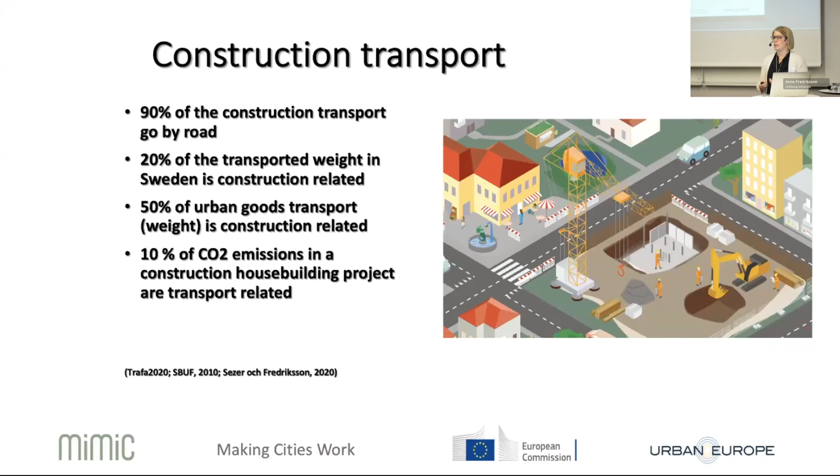And we can do a lot. When we started this project, we had very little knowledge of construction transport. During this project we've collected a lot of data, and we're still in need of much more. But these actually show some of the transport patterns we can see in construction projects.

We can see that on average we have about 0.55 to 0.57 transports per square meter in a house building project. What's really interesting is that about 50% of the transports during the day arrive between 7 and 9. And who else is traveling between 7 and 9? The rest of the city. So these transports actually disturb a lot, and there's nothing except habit that says they have to come between 7 and 9. With a little planning, with the help of, for example, checkpoints, which some of my colleagues will come back to, we can make a big difference.

We can also see that about 43% of the deliveries come by truck, so there is an overuse of trucks, I think - larger transports than needed for the deliveries.

The Mimic project has had three goals we'd like to make an impact on. We want to increase the livability and attractiveness of life in a city through decreasing congestion, accidents, noise and vibrations caused by material flows to and from and on site, because we have an impact on the vicinity.

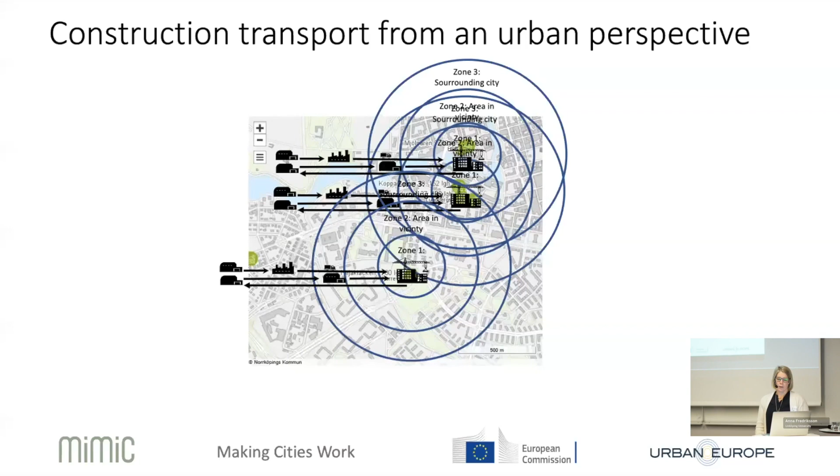Why is it a problem to actually control and do something about construction transports? It's because construction projects run as silos. We have before production, we have a lot of planning, but that planning doesn't always include how to handle things during production.

During production, we had construction logistics, but it's also first seen as a problem once you start. Urban traffic is seen as a problem or something you have to deal with once you've finished the projects. But we have constant ongoing projects, so these phases always go into each other, so we should not treat it as silos.

The overall project goal of the MIMIC project has been to reduce the negative impact of construction sites by improving the governance of construction logistics through implementing smart governance concepts. My colleagues here will describe more of what it means.

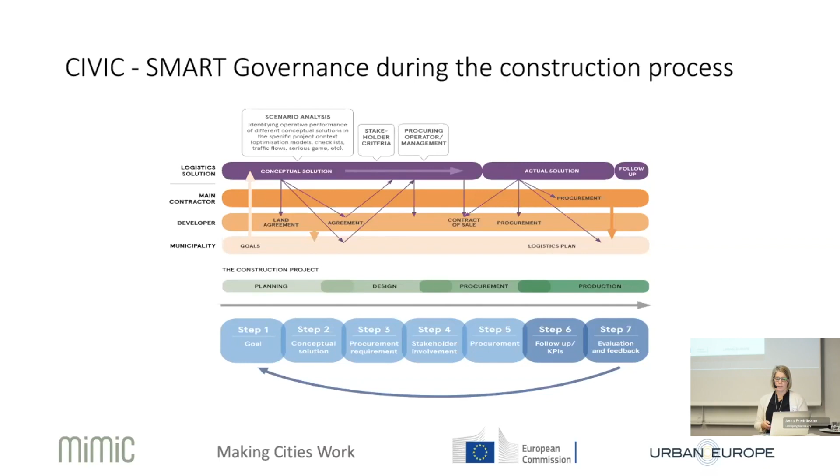This was our starting point, which we have further developed in the MIMIC project, working in 6 work packages. The first, work package 0, has been project management run by Lindholmen or Closer, with an excellent project leader here the last years, Roderick.

Work package 1, we focused on construction logistics scenarios and stakeholder involvement. Work package 2, impact assessments. Work package 3, data analysis and optimization of construction logistics. We had a lot of ongoing interplay between these parts.

In work package 4, we tried to gather what we've done in the other work packages into the testing and implementation of smart governance concepts, which we now, as a final part, try to disseminate.

During the project, we also developed a game - two types actually, one board game and one mega game - because we think one of the main issues of construction logistics is that we don't have the knowledge within urban development, urban planning and so on to handle it. That's why it's also usually ignored.

That's what I wanted to say to start with. I want to hand over again to Roderick.

Thank you, Anna. Thank you for your presentation.

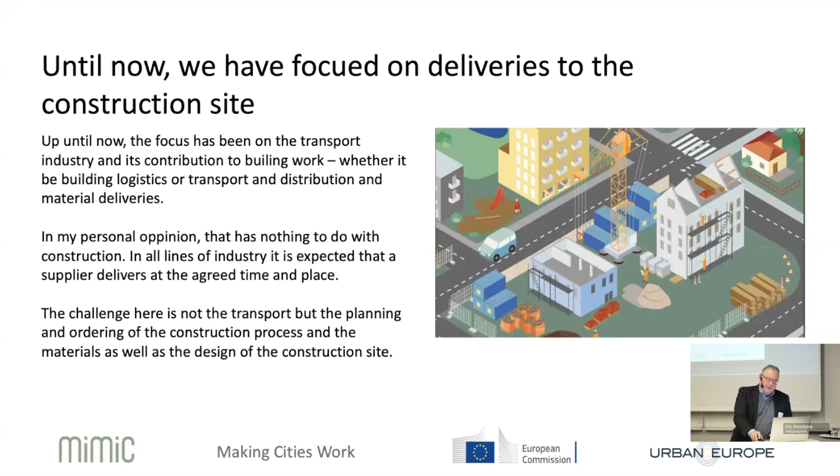In the future, if we remember the first picture, the surrounding areas are what get the problems from the construction site. We need to start looking at that also, because everyone who buys an apartment for 3, 4, 5, or 10 million doesn't want to live on a construction site. So we need to look at that.

We also need to be aware of the future. Can anyone accept living on a construction site, or will they start going on Facebook, Twitter, Instagram, or whatever and writing about it? That kind of thing is going to stop so many projects, because we get negative involvement from the societies, the cities around us.

The status for now, the last 5 years—I'm sorry to say—we get a lot of data, but we haven't moved the construction site at all, if I'm honest. We still make the same mistakes. We still do the same thing.

One thing we've started doing is using planning and delivery systems, and there are 3, 4, 5 coming to the market. I'm sorry to say, a lot of them come from software companies and not from anyone who has actually been on the construction site. So they can do everything with the software, but not so much on the construction side.

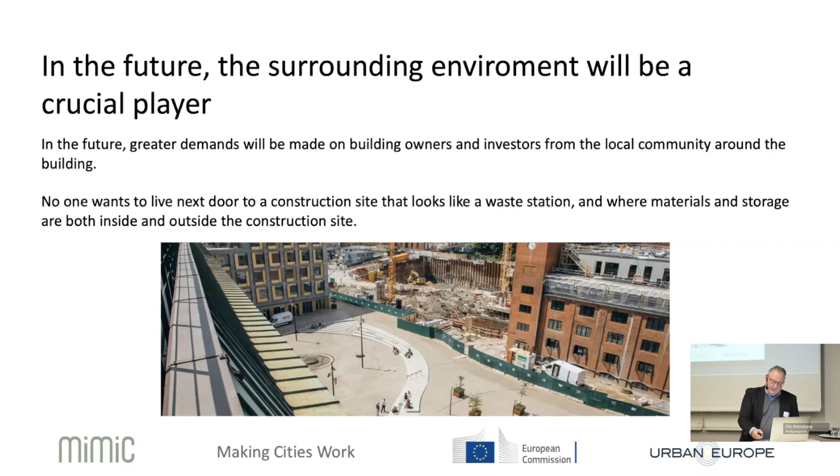If we have to do the right thing in the future, we need to start when we design the project, so we use the right size of material. We design the construction site based on the area we're in. Is it possible to deliver on the existing road, or do we have to build a new road to get in? We have to take care of the whole area, looking from a helicopter perspective all the time.

Which involvement do the construction sites have in the area around them? So construction logistics starts when the developer has an idea. How do we want to sell this project? What do we want to leave to the area with this project? Because if you treat everyone badly during construction, they're never going to be satisfied with the house. So we need to start much earlier in the project.

One more time: what's in it for me? That's the only thing that can move this. And as long as no one wants to do anything other than make fast money, we're not going to get anywhere else in the construction site.

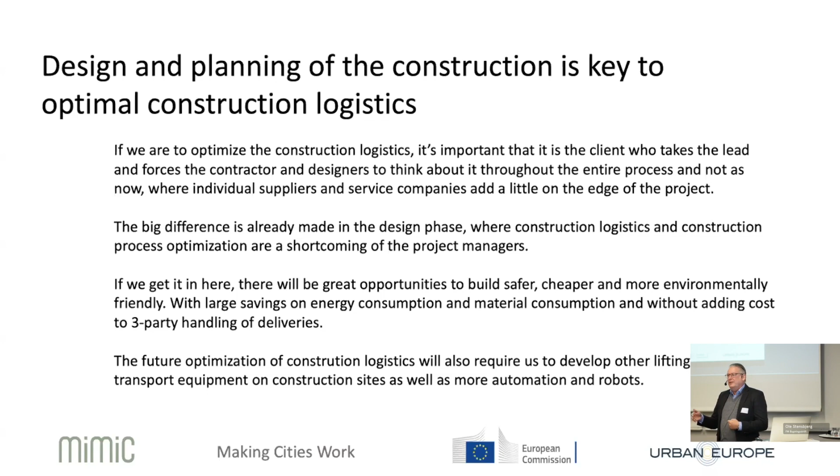Now, some companies deliver material and call themselves logistics, or it's a company making software and they call it logistics, or it's someone carrying things in and they call it logistics. We need to be more professional and help from beginning to end. It's not about making fast money by carrying things in - it's about planning and designing.

So when you need to plan construction logistics, you need to know something about buying materials. You need to know about designing. You need to know how to do construction. You need to know how to be a site manager. You need to understand the process. You need to know a lot about communication with the area around you - everything we've discussed here is so important. If you don't know that, you can't design construction logistics. If you only know about cheap labor carrying things in, or software to optimize it, no software functions at all without humans. We need to combine these things.

The most important thing for whatever we're going to do in construction and logistics is data. If we don't know how much there can be, where to put it, how to handle it, then we don't get anywhere. Data is everything, and you don't know that if you only work with software. So it's from the beginning - designing, production, execution.

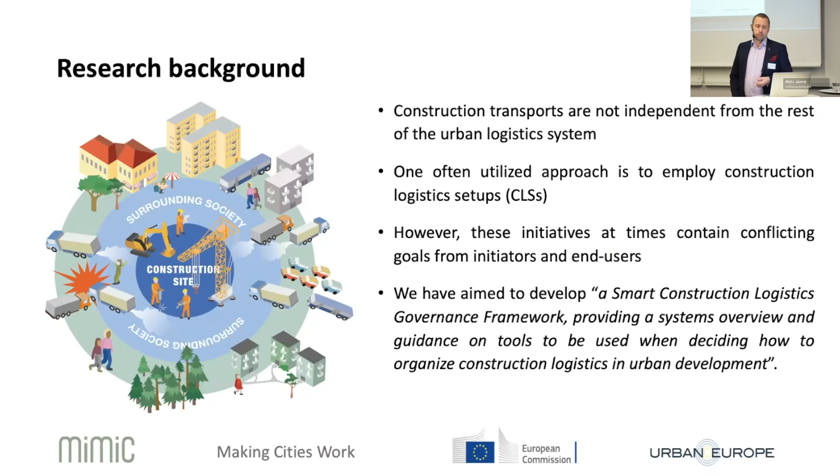But first, a quick retrospective, or a trip down memory lane.

Anna mentioned her daughter was born during Civic, and I'm not going to talk about her, but I will talk a little bit about Civic. Because in 2018, when we were finishing off the Civic project, we presented the first smart governance concept that Anna already showed you.

In this smart governance concept, we started by taking the construction project's phases into consideration, seeing that we have planning, design, procurement, and production. We tried to fit in where we should design, implement, and operationalize a construction logistics setup during the construction process. We saw that we had different actors impacting the design of this.

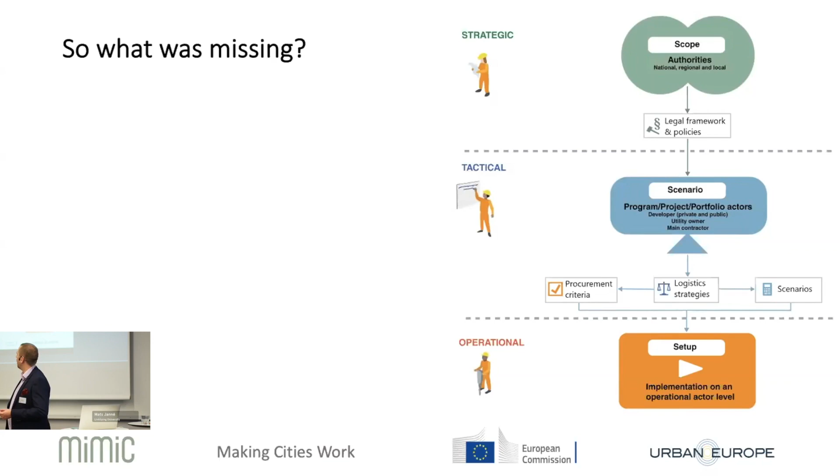We saw that we probably needed to know more. So what was actually missing in our view in Smart Governance Concept 1.0? I was trying to figure this out the other day. Firstly, what we didn't have was the view that decisions are taken on different planning levels.

We take decisions regarding construction logistics on a strategic planning level with a long planning horizon, but we don't necessarily see it as a construction logistics decision. I'll get back to this a bit more. We take some decisions on the tactical level, the mid-horizon planning level, and of course we do take construction logistics decisions every day on the operational planning level as well.

Secondly, we needed a stronger identification of the different actors' roles in these decisions. In our Smart Governance Concept 2.0, we've seen that these long-term strategic decisions, which aren't necessarily viewed as construction logistics decisions, are often taken on an authority level. It can be things like introducing environmental zones or increasing demands on following up the environmental impact from construction or deliveries to construction sites, etc.

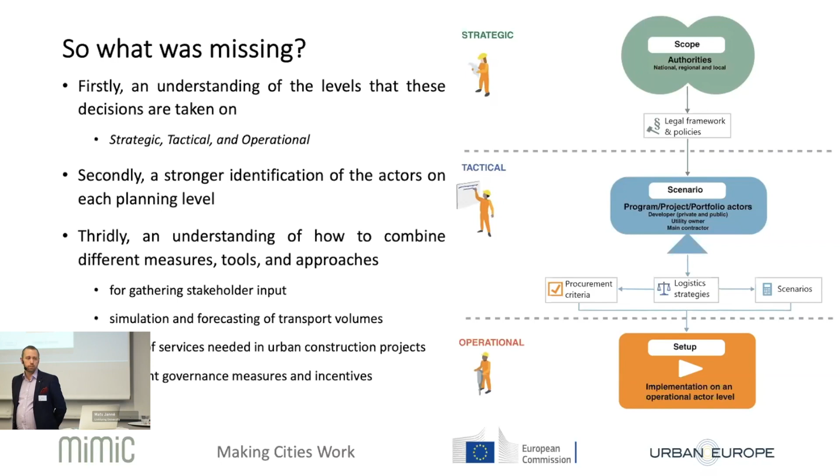And we've been working with these questions for many years now - 3 years in Mimic - so let's stick to that time plan.

What we've seen is that on the authority level, construction logistics is partly approached as a way of reducing environmental impact. This is in line with all our EU goals, our UN goals of reducing climate impact, etc. This is a strong driver for authorities and cities to start demanding more from construction logistics.

We also see that we have some activities regarding construction logistics planning on all three planning levels - strategic, tactical, and operational. But from the authority level, it's primarily on the strategic level, and the planning on these three levels is rarely performed by the same actor, or even with the same types of goals. So this leads to a difficult situation.

If we want good governance of construction logistics within urban development, we need a holistic perspective on what we are doing. We need to understand what's happening on the construction site, as Ole mentioned, and we need to understand how we can control the deliveries to and from the site to reduce impact on the city as well. But we don't really get this holistic approach unless we introduce this as a question on all the different levels.

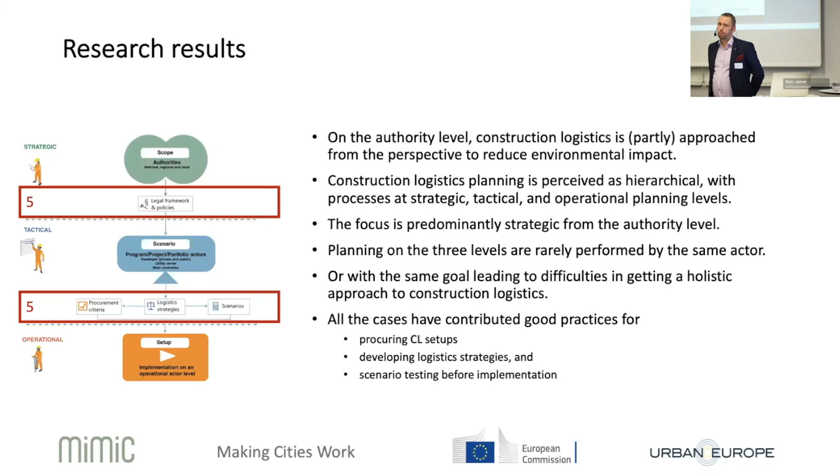We see that there are many good initiatives and many good tools around Europe. We have good practices for procuring construction logistics setups, developing logistics strategies, and scenario testing before implementing a construction logistics setup. We will hear more about this later today. It's this holistic, smart approach that we need, that we are kind of lacking though. And that's pretty much where we come in, I hope, and I hope you will agree as well.

Because we have developed Smart Governance 2.0, and this is how it looks. It didn't used to look like this, it's much more beautiful now. But what we can see from this is that we can still keep the strategic, tactical, and operational decision levels or planning levels, and we need to keep all these three levels.

On the strategic level, that's where we set the scope for what construction logistics should achieve in urban development. Here we have identified authorities, different municipal departments, regional authorities, etc., as key actors that can, through legal frameworks and policies, actually start demanding how we approach construction logistics in a good way. However, tweaking our policies or changing the legal frameworks might be difficult to do quickly, but in the long term, perhaps we can do that as well. But we need to know what we are going to demand. So we need to have knowledge from different KPIs, we need to measure the impact, we need to understand what different actors need and what they can contribute to in the overall construction logistics vision.

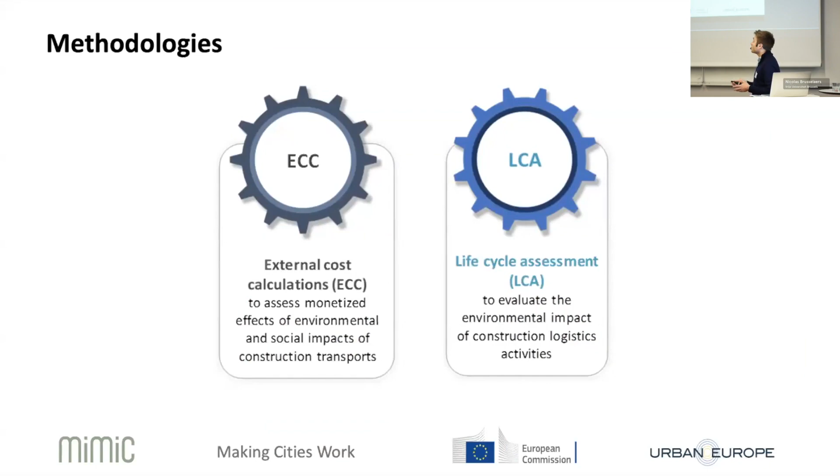External costs come in all kinds of shapes and formats. The most known are climate change and air pollution, but we also think about noise and congestion, for example. Mainly road transport is responsible for a large share of external cost, and these can all be monetized into what we call the external cost calculator, to evaluate and compare different scenarios against one another.

In Belgium, we gather our data from what we call onboard units - GPS trackers, GPS receivers that are mandatory in all trucks across the entire territory of Belgium. So we have location data on all the trucks in Belgium, and we have the transported distance.

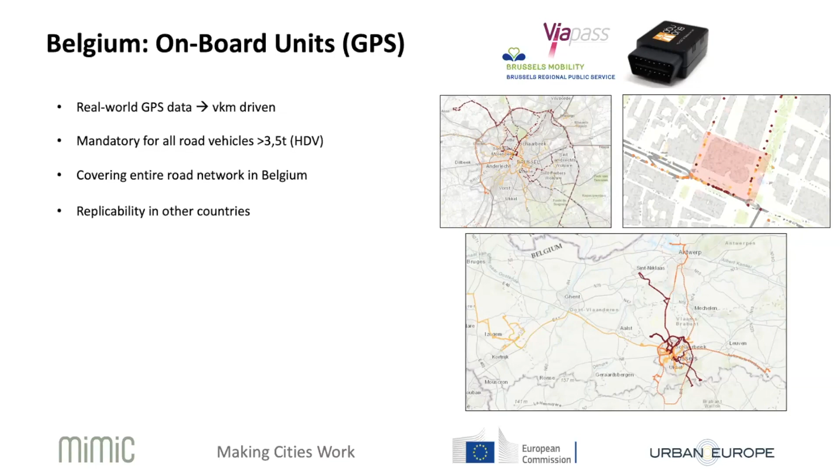With this transport data from the OBUs, we developed a filtering algorithm to filter from the entire set the vehicles that deliver transports to the site. So we know per day how many trucks are driving, and we can recreate the origin-destination pattern, the route taken for each truck and its characteristics. We then process that into a geographical information system environment to detect more information, and calculate the external costs linked to those transports.

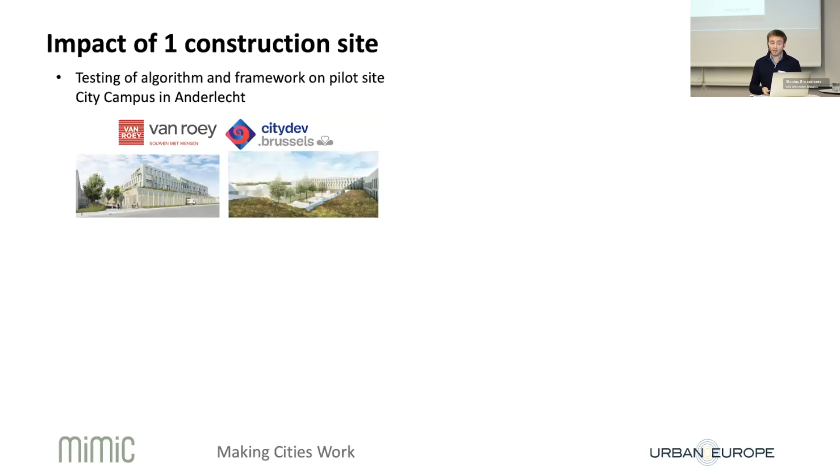So what we wanted to show you here is that we first tested this algorithm and its impact framework on one pilot site, namely the one located in Anderlecht in the Brussels Capital Region. Like Anna mentioned before, it has a huge impact, not only on the construction zone itself and its immediate surroundings, but also on the highway, the ring, the highway infrastructure, and the road network along the canal region - the canal that crosses from south to north through the capital. It also has an impact on the traffic system as a whole throughout the city.

Now we are checking if it's possible to extrapolate those findings and use that algorithm for 83 large construction sites in the Brussels Capital Region, to see what the impact is on the entire city from large construction sites.

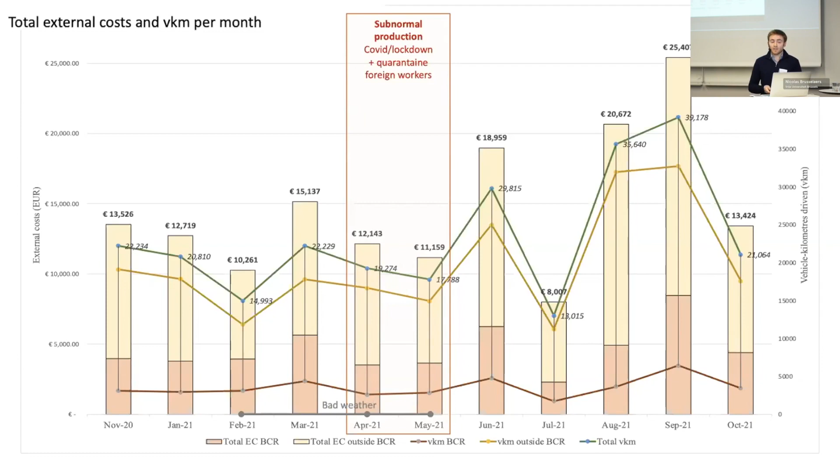For example, in April and May we have subnormal production because of lockdown and foreign workers needing to quarantine. We have the construction holidays, which are typical simultaneous holidays in the Netherlands and Belgium in July, with much lower deliveries. We also see 3 big months - March, June, and September - with a lot of concrete and steel deliveries. Especially for September, we see a nice transition from the superstructure of the building to the ceiling, and different construction phases from August to September with a lot of material deliveries for insulation, windows, etc.

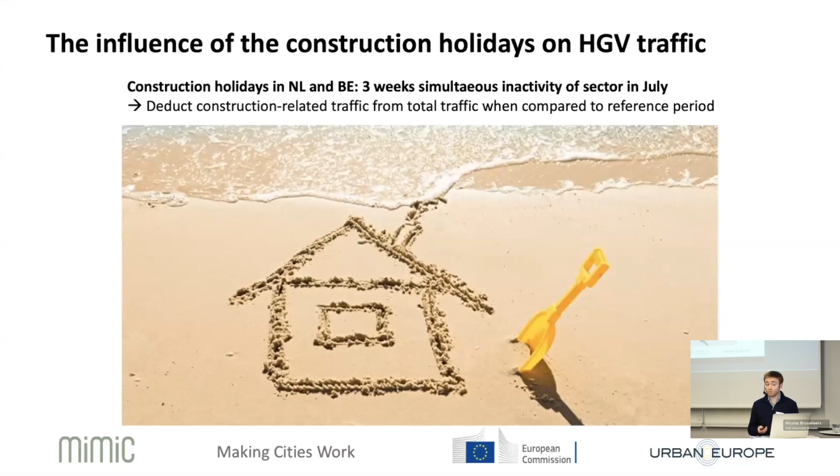Now, this is one construction site in the Brussels Capital Region, but what if we can deduct the influence of the construction holidays on all trucks in Belgium? We have simultaneous holidays - a 3-week period in July where the construction sector is totally inactive in the Netherlands and Belgium. So we can deduct construction-related traffic from total traffic by comparing it to a reference period outside the construction holidays. We see that difference is approximately 17.5%, so we know that 17.5% of total traffic is related to construction-related transport.

Important to note here is that construction transport is said to represent more than 15% of total external costs, which is a large share of total traffic. This mainly comes from congestion costs, but also infrastructure, climate change, and air pollution costs.

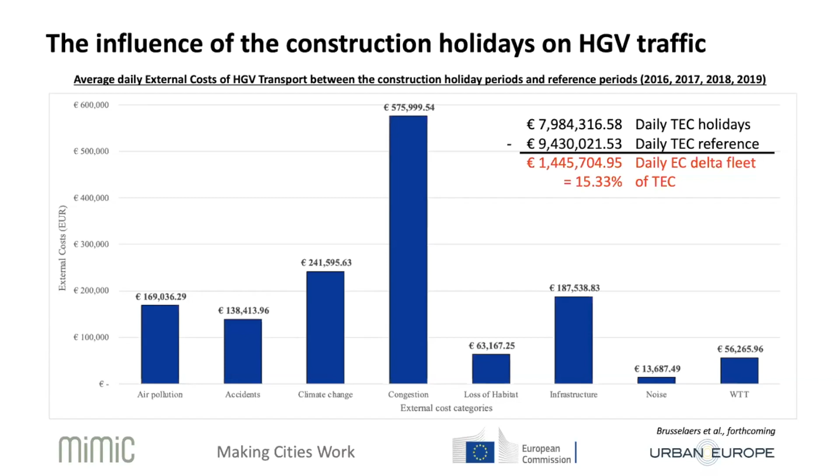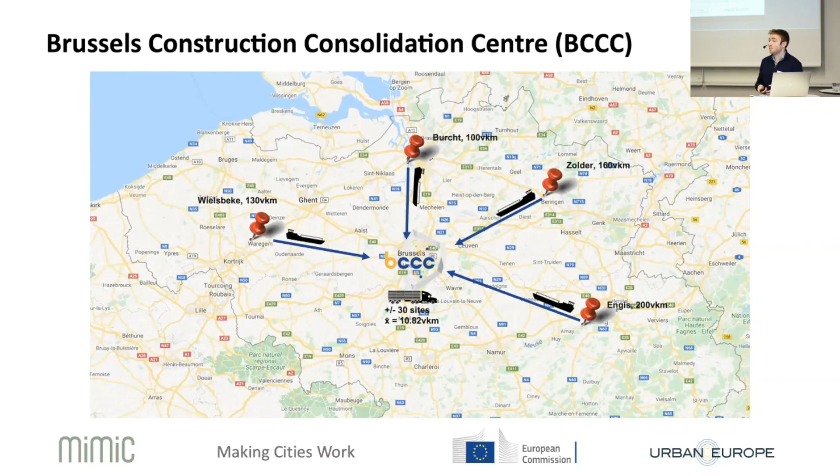This was a final case, from the Brussels Construction Consolidation Center, in which we analyzed 2 scenarios: what would happen if we implement a BCCC, which was the actual case, compared to business as usual, where we deliver all transport from the suppliers - those 4 main suppliers across Belgium - immediately to the construction site. The conclusion was that thanks to implementing the BCCC setup, we have a reduction of 59% of total external costs, mainly from congestion, because we take a lot of trucks off the highways in Belgium, and a large reduction in climate change costs.

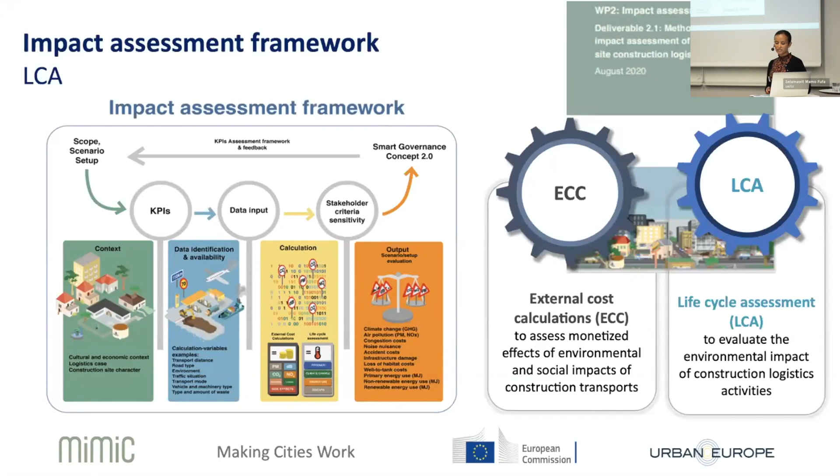As Nicola mentioned, we developed the impact assessment framework within the MIMIC project, using two methods. I will talk about LCA, which we use for environmental impact assessment of construction logistic activities. We use as a case study the demonstration pilot, the Oslo emergency ward, which is under construction and expected to be finalized in 2023.

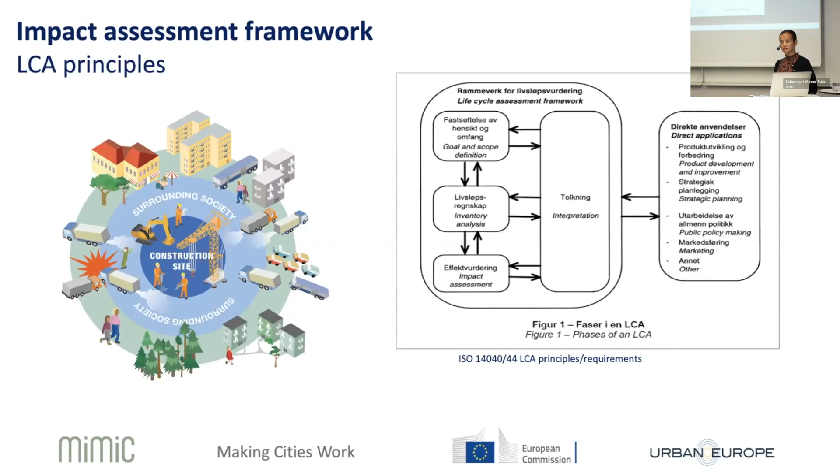There are different construction logistic solutions considered in this project, including the use of fossil-free and emission-free solutions. For our evaluation, we follow the LCA principles: define the goal and scope of the work, collect data, perform impact assessment, and interpret the results.

The goal for our demonstration pilot is to evaluate the environmental impact from on-site and off-site construction logistic activities. We include the transport of mass and materials to and from the construction site, the construction machinery, and on-site construction activities, including internal transport, energy use, and waste, and also the transport of waste and waste treatment.

For the life cycle assessment, we use the life cycle modular principle, and we include two life cycle modules: A4, which is the transport from the buildings to the building site, and A5, the construction activities. There are two indicators we have used: greenhouse gas emission and resource use, both renewable and non-renewable energy.

We have collected data for the activities shown on the right side, based on actual data from the demonstration pilot. Since this is an ongoing project, we have collected data only from the groundwork, foundation, and superstructure construction phase, and we have used generic background data for the evaluation.

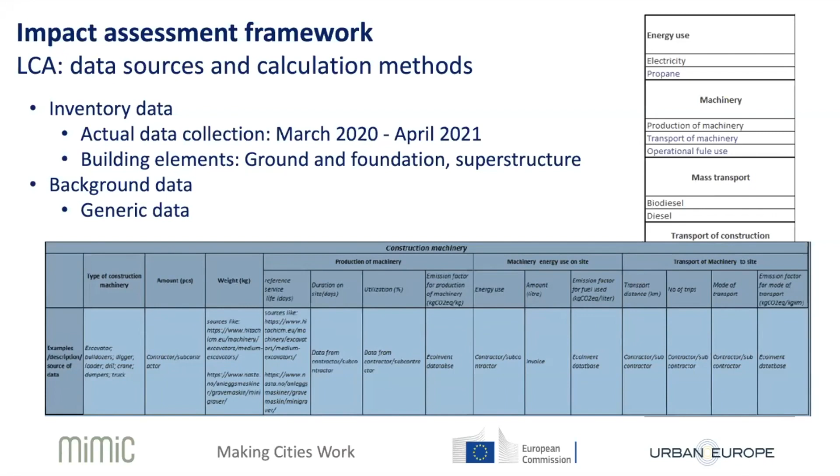To see the impact from emission-free, fossil-free solutions based on the base case scenario, or what they have considered in the project, we have conducted scenario analysis for the machinery and mass transport. We also try to consider the impact of modal shift for the material transport.

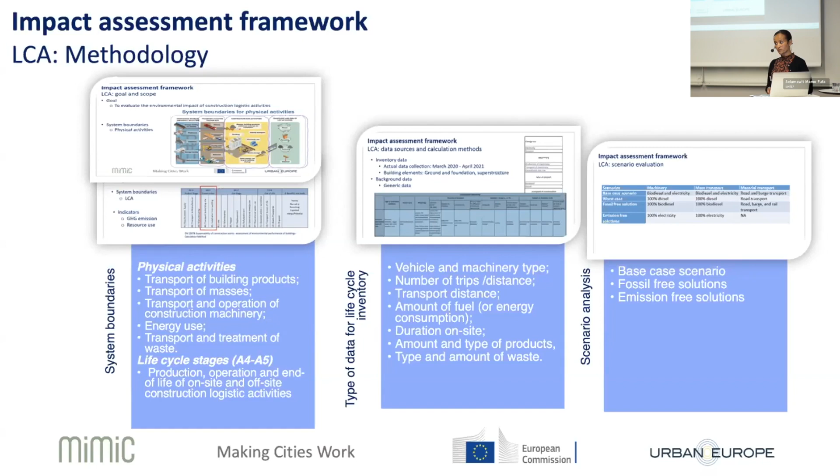By combining this, based on the data we have collected for the physical activities and also the scenarios, we have conducted the impact assessment. This is the result for the emission part.

For the scenario evaluation part, since mass transport is the main emission contributor, we considered these scenarios as I mentioned earlier. If 100% diesel was used, there would be 40% more impact from mass transport compared to the base case scenario. But if all the vehicles were electric driven vehicles, the impact would have been reduced by more than 80%. This is very significant.

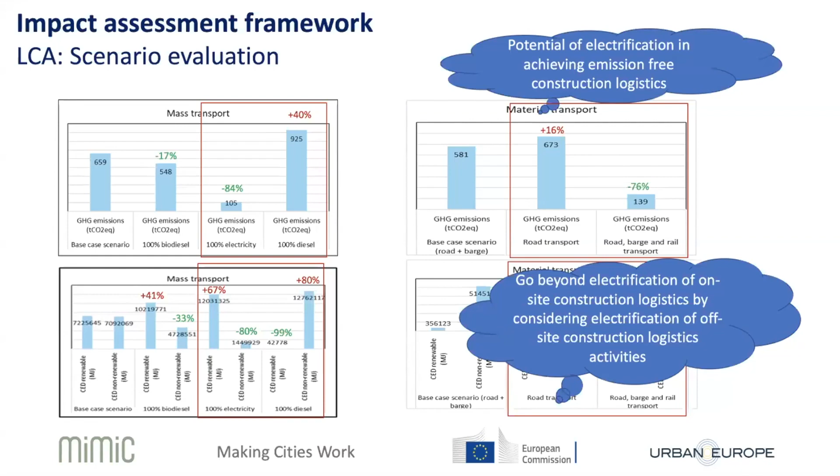This shows there is potential for electrification in achieving emission-free construction logistics, but the focus shouldn't be only on-site—that's the current situation in Norway. We need to focus also on electrification of the off-site construction logistic activities.

In conclusion, there is a large potential in electrification of both on-site and off-site activities in order to achieve emission-free construction logistics. But it's important also to consider other construction logistics solutions, which have been presented earlier as well. Implementation of the impact assessment framework in the smart governance concept that Mats presented will help to evaluate and follow up actual impacts of strategies, like the requirements set in procurement.

LCA and ECC methods need to be conducted in the early phase in order to evaluate, plan, and compare different emission reduction measures, but also during the construction phase in order to see the actual impact reduction of measures. But there is also a need for clear description of the system boundary, assumptions, and the background data source, in order to make a good comparison or to understand the result.

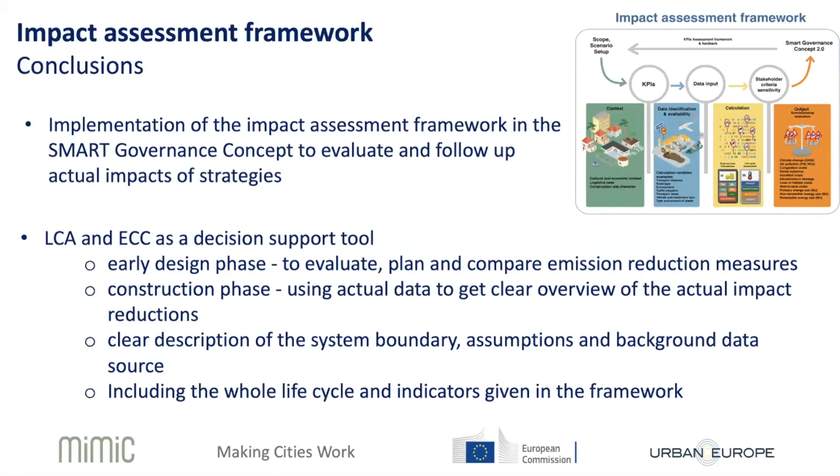Finally, including the whole life cycle, not only the construction phase but the whole life cycle, is important, and also including more indicators. For example, in Norway we are focusing on greenhouse gas emissions, but we need to include air pollution and others, like Nicholas presented earlier. As further work, we also saw in the question that digitalization is

important for both data collection and also for life cycle inventory databases. Collaboration, as Rodrigo said, in different forms is important to increase accessibility of data and also availability of solutions, and more best practice and reference values. Finally, methods which show the environmental impact reduction measures and the actual impact on achieving environmental goals are very important.

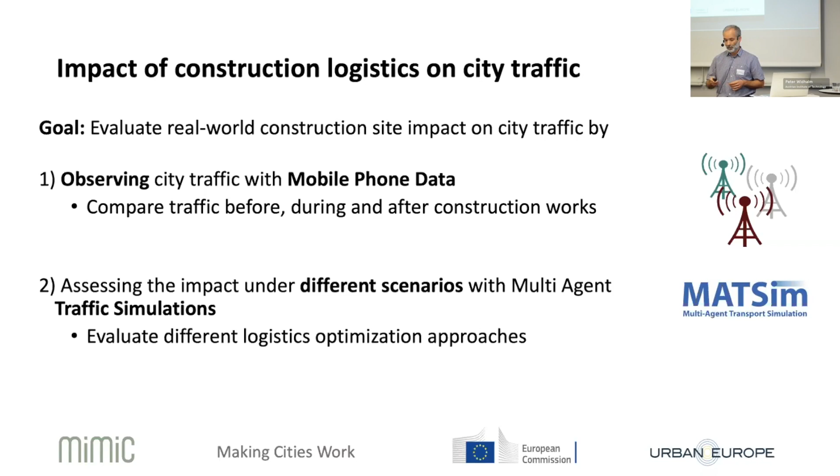We applied the methods to a test site in Vienna, where a new subway line is currently being built. This is a quite large construction project, and it involves several construction sites throughout the city. One construction site was at an intersection with an existing subway line in July 2019, and because of this construction site, a section of the existing subway line had to be closed, and car traffic was also affected as several of the driving lanes were closed as well.

So how can we use mobile phone data to evaluate and measure the impact of such a construction site? Mobile phone data do not contain precise GPS coordinates, and neither are they sampled at regular time intervals. Instead, only when a mobile phone or any other mobile device communicates with the cellular network is a record generated, and this record only contains the ID of the antenna through which the device communicates and a timestamp.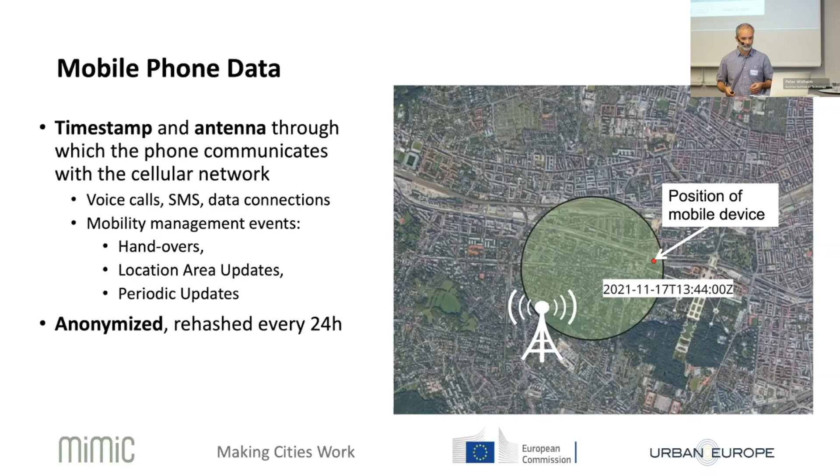When we look at the sequence of mobile phone records generated by one device, we can observe how it moves and travels through the city. But the spatial resolution is low, and the gaps between records can be quite large. The advantage of mobile phone data is that they provide information about a large sample of the total population, and they are always up to date, as compared to travel survey data.

So I think we could say that mobile phone data are not really suitable to observe the precise movements of an individual, but they provide statistics about the movement patterns of the population. For this to work, we need probabilistic techniques.

In our case, we developed a probabilistic method to infer the travel route from the mobile phone records. We do this by matching the mobile phone data with the transportation network, both the road network and the public transport lines. This matching is not only based on spatial proximity, but also takes into account temporal aspects, such as travel times between two points or the public transport timetables.

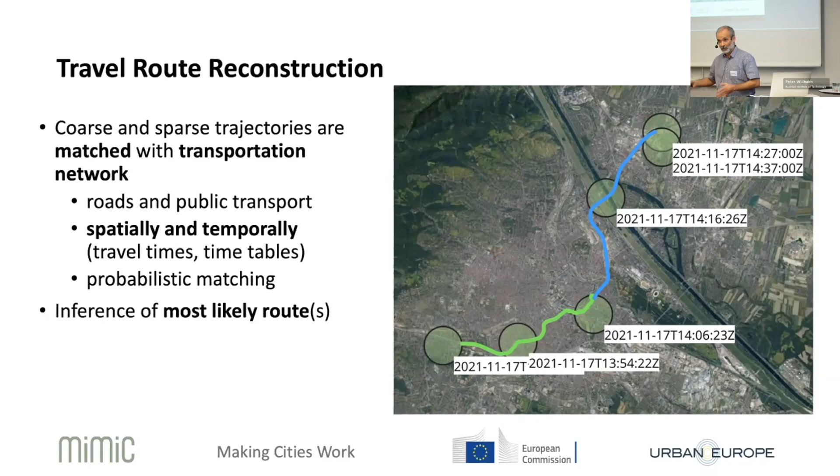This matching is probabilistic in the sense that there will not always be one unique travel route matching the records we observe, but there could be several matching travel routes. Our method computes the most likely routes along with their respective probability.

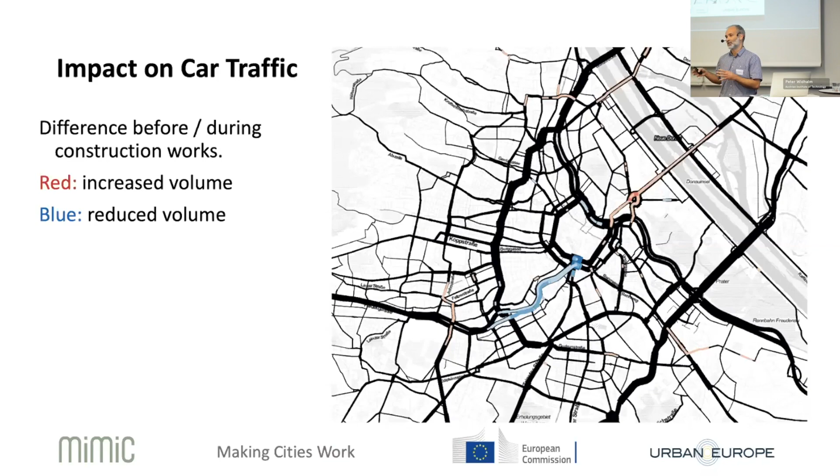But we have to remember that this was during July, and this is the area where two of the largest outdoor recreation areas in Vienna are located. So this could, at least in part, be explained by just people traveling to and from these recreation areas.

Okay, so far I have talked about mobile phone data and about observing traffic and observing impact. But of course, for planning and optimization, we need to evaluate different scenarios. And for this, we developed a traffic simulation model. This model included Vienna plus surroundings in a 30-kilometer radius. It included the entire transportation network, both roads and public transport, and also a large number of facilities to visit.

And the model was informed by different input data sources, for example, travel surveys to calibrate mode choice models, and also traffic count data collected at 180 different count stations in Vienna to calibrate transport volumes. And actually, you can also use the mobile phone data to inform the model, and this would then mainly be trip chains that define how the simulated agents in the simulation move.

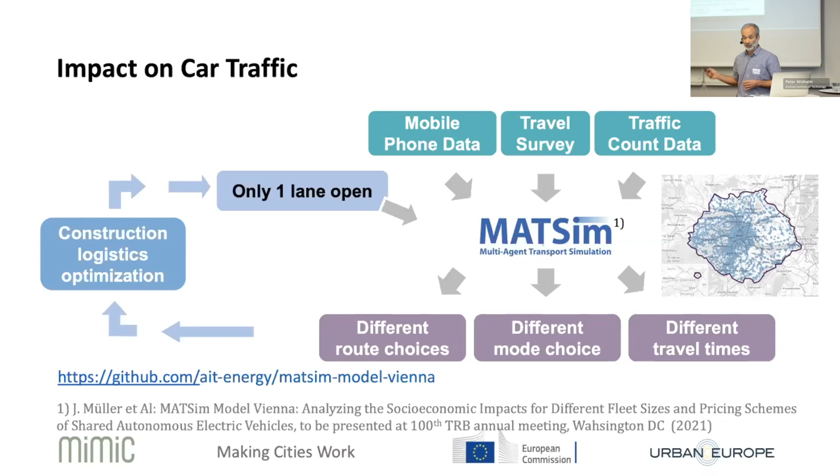And we can then use the simulation model to predict changes in route choice, for example, and the resulting transport volumes in the network, this time for 3 different construction sites in Vienna. And in this case, we see forecasts and not observations, so that's a difference to what we have seen before in connection with the mobile phone data analysis.

And of course, the simulation model can also tell us about congestions and how travel times change, and visualize the differences again in the transportation network. And this output can then be used to further optimize construction logistics.

Okay, just to wrap it up quickly, I told you that mobile phone data can be used to measure and analyze the impact of construction works on city traffic when they already exist, by comparing situations before and after, before and during. And the traffic simulation model can be used to evaluate different scenarios before they're implemented, and they then provide the basis for construction logistics optimization. Thank you.

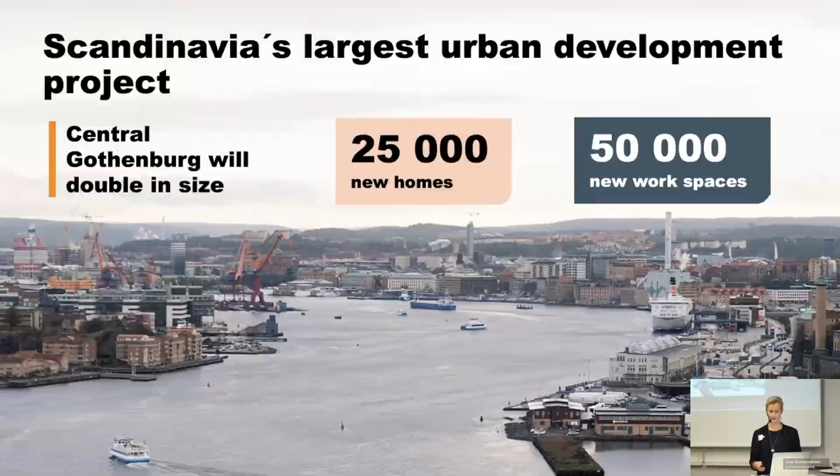All of our projects are sitting along the river, so we always have this big barrier that we have to work with. The whole project started about 10 years ago, and I'm working on the part called Södra Älvstranden, which is basically across the river from where we are now located at Lindholmen.

Besides all of these projects, Gothenburg is also right now having huge infrastructure projects. There's many new bridges across the river and tunnels under the river being planned and built and completed, a tunnel for trains and so on. So there's big infrastructure projects at the same time that we are trying to turn all of this into new urban sustainable neighborhoods.

At Älvstranden, we saw that we're going to need to start thinking about construction logistics and what is our part in this. How can we push the development further in this area? As part of Mimic, we have developed a strategy for what we can do in our part of this big project in Gothenburg.

This strategy was completed in March this year. I think the strategy itself isn't presenting anything revolutionary that will drastically change how we do it. But by having a strategy, we initiated something, and now we are talking a lot more to the other parts of the city about how we're going to do this together, what our different roles are, and what demands we can place on the developers and construction companies that are building. It's been interesting being the project leader for this strategy we now have in place.

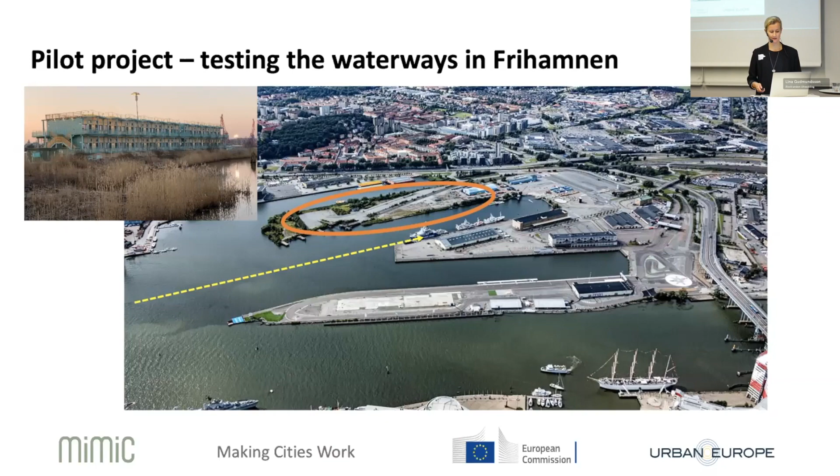And here are just some photos of what that looked like. So this flatboat, I think it's called, that you see have arrived here, and they are unloading one home at a time, putting them on a lorry, and then the last 100 meters, they had to go by lorry to the site. And there were some very interesting lessons learned from this project.

So basically, we saw with that, one flatboat could bring in 48 units instead of 24 lorries taking 2 units at a time. We saw a huge reduction in the carbon dioxide emissions, 60%, that's quite a lot, compared to if they had been brought in by the road.

And then also there was some good savings in when it comes to efficiency. So basically they could unload all of the units in one go rather than unloading 4 units a day over a 12-day period. And there was also no need for special transport permissions in order to bring up a wide cargo on your lorry.

Obviously, there were other sort of permissions that you needed to bring in the boat and to access that. But we saw that this is successful, and we need to now be much sharper in actually using the river and putting that as a demand early on in the project, because here we were kind of saying halfway through, actually, could you try using the river now? And that caused them some problem, because they had obviously their schedules and so on. So that took some, we had to persuade them to do that. But we saw that this is interesting and we need to do that much more.

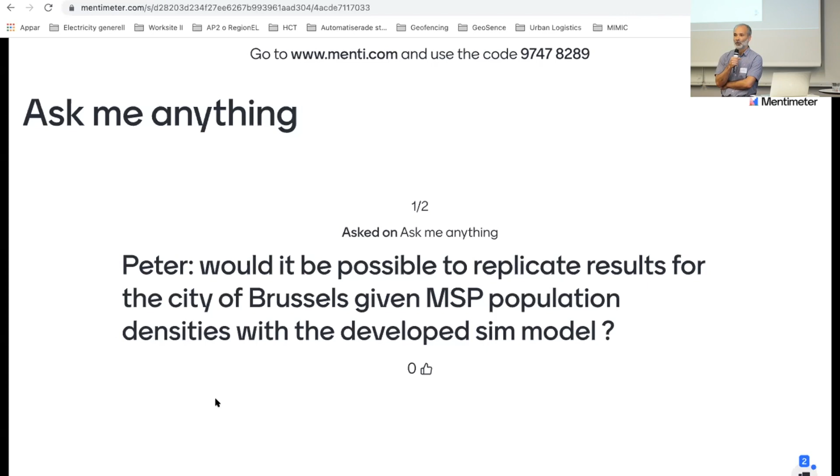Yeah, thank you for the question. Okay, hope you can hear me now. Thank you for the question. You could use the same simulation framework and the same approach, but not the same model, because this would involve building the model, including population synthesis, the agent behavior, the transportation network, and so on. The simulation model we built is only valid for Vienna, but of course you can follow the same approach and build your own simulation model for any other city.

Thank you, Peter. Do we have one more question from the audience?

Hey, Kristina from Volvo here. I'm quite interested in this LCA and the cost there, because from the entrepreneur side, even if you'd like to be very fossil free, you can today buy electric trucks, but the cost is quite high. So would it be possible to combine those methods and give some more positive figures for entrepreneurs thinking of buying electric trucks? Thank you.

Very good question, because that's our plan to combine the LCA and LCC method in order to evaluate all these emission or fossil-free solutions in terms of the cost. Nicolas is an expert in the LCC part, so he can explain more about the method.

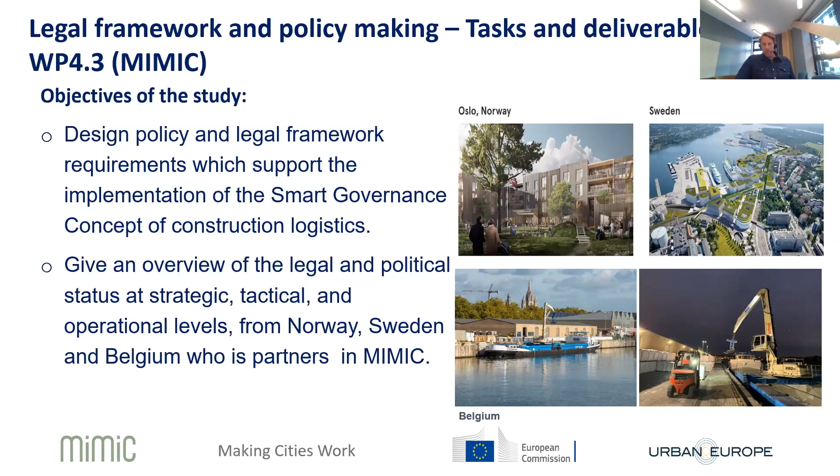The content is to find out the existing legal frameworks in Norway, Sweden, and Belgium at the state, regional, and local level—acts and guidelines at different public administration levels. We also looked at good examples from a logistic perspective from each country, and finally the most important recommendations for approaches to create awareness and have an impact on legal and policy development.

In all three countries, political movements towards more green solutions open for implementation of construction logistic solutions demonstrated in the MIMIC project. There are several activities to achieve higher ambition levels in regional and local requirements for construction sites, including transport and construction logistics activities.

From a logistic perspective, the legal framework in Norway at the state level can achieve much higher ambitions when working at the state, regional county, and local municipal requirement level for transport and logistics associated with construction sites.

We have done an overview of legal and political framework in all three countries, and we have looked at it at the strategic, tactical, and operational level.

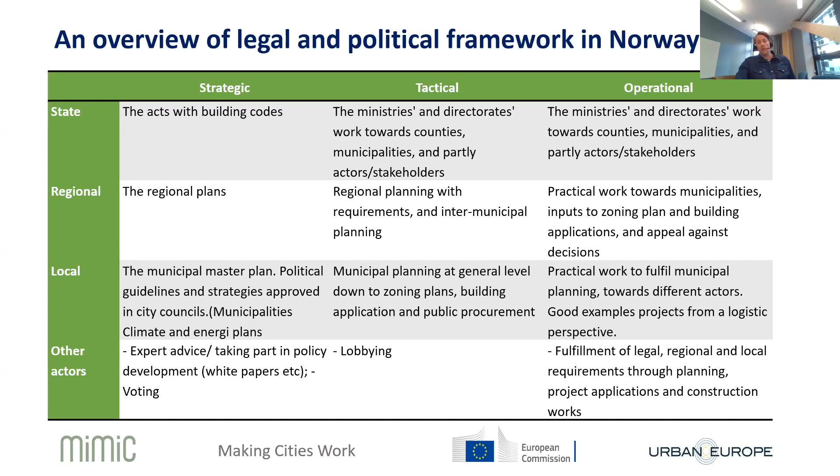Very important with good example projects from a logistic perspective, and we will have a look at one of those.

The status of legal and policy in Norway: the Norwegian Environment Agency points out that municipalities and businesses can work together in setting requirements to suppliers to obtain fossil-free or emission-free construction sites. It is nevertheless at the municipal level that the important provisions for the relevant construction projects are decided. As I told you a little bit earlier, a review of the Planning and Building Act and the Building Code shows no specific requirements related to fossil-free or emission-free construction sites.

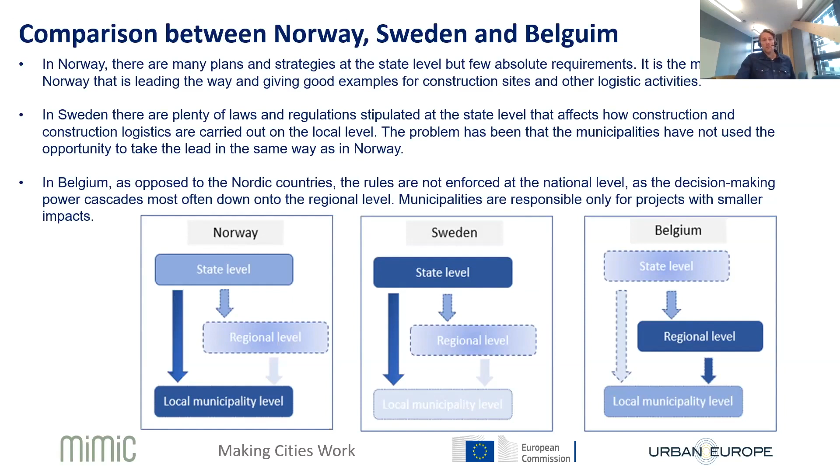And in the end, we have made these policy recommendations, measures that can strengthen the policy framework and improve the environmental performance of construction logistics at each of the three hierarchical levels.

At state level, it's very important to focus on reducing emissions by setting mandatory targets, recurring data gathering to follow up the targets, setting good examples for working towards reduced climate impact by utilizing construction logistics setups in state commissioned projects, supporting cost reduction through incentives and subsidies, and providing and stimulating the required infrastructure. That could be electricity, hydrogen, transport machinery, waterways for new markets.

At the regional level, it's important to increase awareness at the political level by increasing testing in pilot projects, following up on emission updates based on knowledge gained, and clarifying and unifying the roles, mandates, and legalization of different municipal administrations. That could be building regulations, traffic management, and environmental concerns. And you have to set clear, objective-based incentives to allow for competitiveness across regions and states.

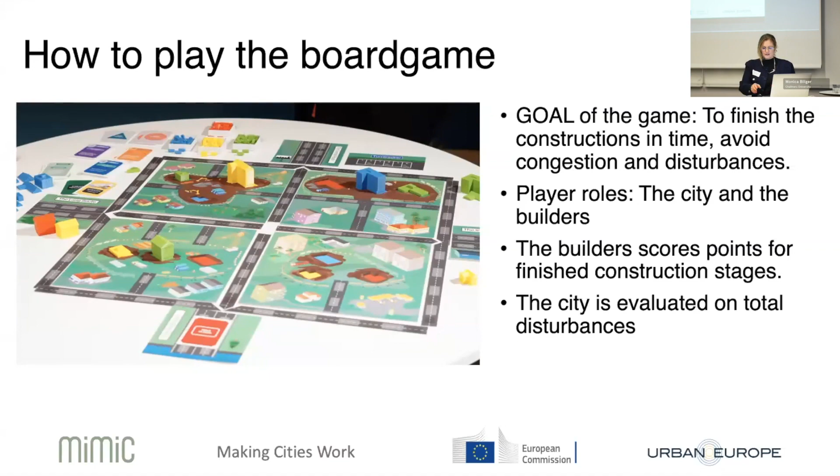And learnings—we have two key insights from testing the game. First, the specific game design patterns influence the game's purpose, and we had to change the game mechanics many times. From the beginning, winning wasn't really so important, but we realized we had to have that motivation to make it realistic. We also had more stakeholder roles, but that became too complex and took too long to play, for example—so we changed things like that.

Also, timing is a real problem sometimes—it takes time to learn to play a board game, and you don't always have workshop time for hours, so you have to keep it within some kind of time limit. The other insight, which Carl really pointed out as a very experienced game designer and researcher, is the difficulty with different player types, especially very inexperienced ones who could be too careful and take very long to learn the game.

And then we have the too aggressive player type, usually more experienced but doesn't have to be, or too invested - investors think it's really about their own personality and have a problem with that they are playing. Not invested enough - I don't care, doesn't matter what I do. Non-compliant, not following rules, or even boundary testers who just play to test how it works. All of these types, we are probably one of them ourselves in one way.

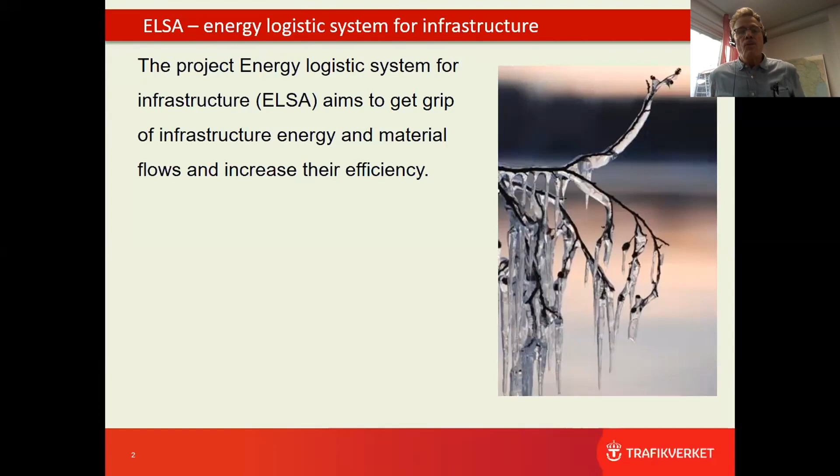We call it in Swedish ELSA, Energiledningssystem för anläggningar, which is a bit difficult to translate to English. You will see various translations during this presentation, such as energy management systems for plants or for construction infrastructure. The aim is to keep track of our metabolism, our flows of energy and material, mainly through the works contracts. We are starting by following up the energy turnover, the climate impact gases, and excavated masses, earth.

And we also aim soon to start with environmental product declarations of the things we buy. What do we want to capture? We want digital messages to the TRV, short for Transport Administration, into our system. ELSA is going to be an internal computer system within Trafikverket. We have, since last year, a digital channel of entry into this flow, and we want to use the delivery note in digital format, by the Swedish building branch electronic business standard. I will tell you a little more about that soon.

First of all, we want to keep track of our climate impact in terms of fuel used by lorries and machinery by our contractors. Secondly, as I told you, the excavated masses - where are they taken from, how are they handled, where are they brought, how much are they, etc.

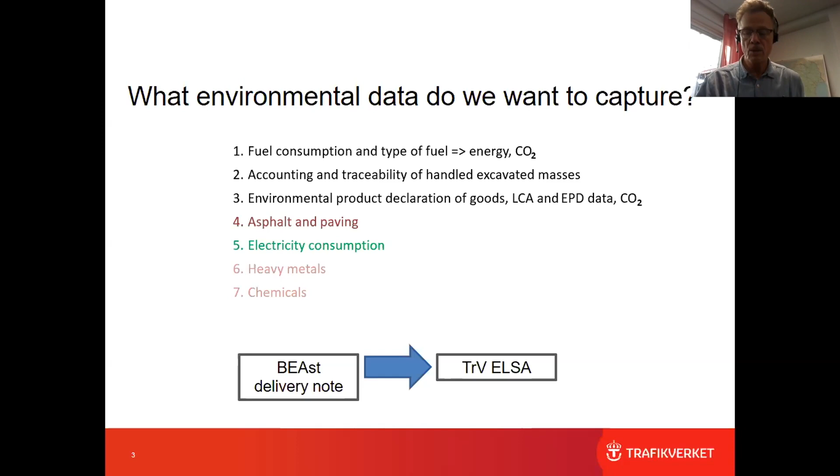Not in the ELSA context.

I have seen this as a 3-stage rocket, this project. First stage is to know what data can we collect and what do we want to collect. When we do pilot trials, we find out how we can require monitoring by our contractors, and this should be entered into our contracts. And when they start to work, we will collect data. It is really only then that we have a solid basis for requiring savings of, for example, climate emissions. Now we are doing this already, but it's a little blindfolded, and sometimes we have to go back or change our requirements.

As it is today, to share digital data, there are 4 major requirements we have identified. One, it should be digital. Secondly, it should be standardized. Thirdly, the requirements should be so specific that you can give them to a computer programmer and he knows what to do on a very detailed level. Fourthly, we have 100,000 companies within the sector in Sweden, and many of them are one-man companies. They all need to be able to join, so it should be easy to join.

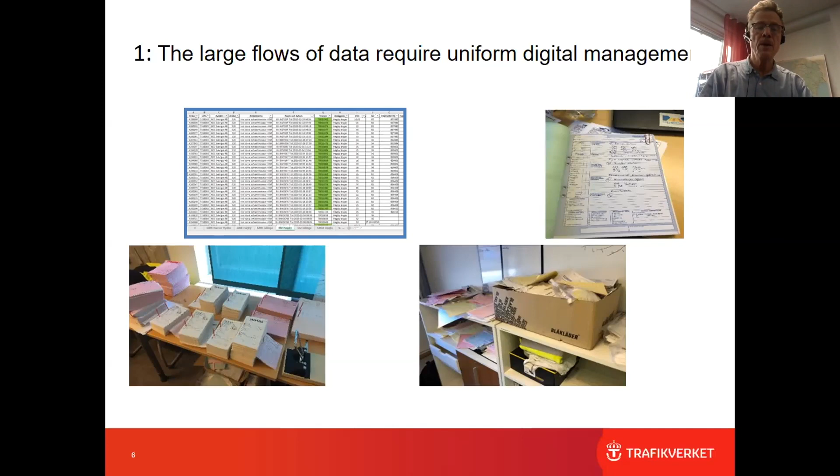Perhaps you have seen a building site. Often we have loads and loads of paper, and in environmental follow-up we have loads of Excel tables and so on, and one is not like the other. We don't want that. We want to have standards.

Now we have a development where companies and authorities are opening their own portals and saying come and report in our portal, or come and order in our portal. And one portal cannot talk to another one. This is not what we want. We want them all to be able to talk to each other, not through portals, but the systems should be able to talk to each other directly, not analogically or manually.

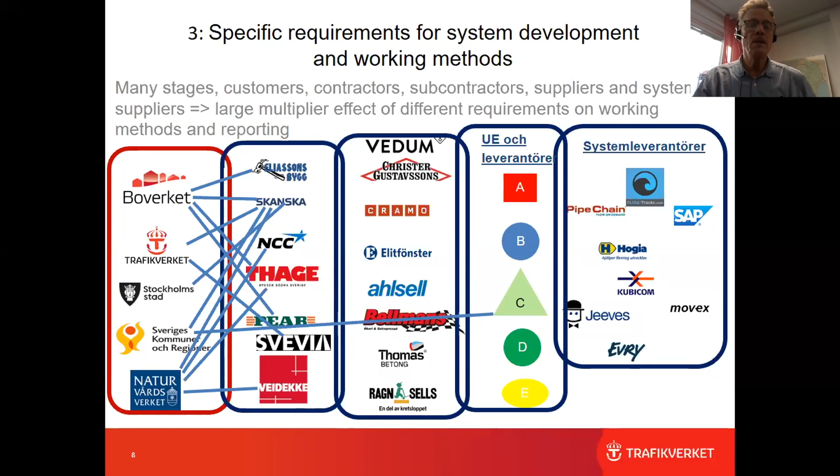If you look at the chain of supply, we have clients or authorities, and we have contractors and subcontractors in several levels, and they have computer system support. If they start to require things in different ways, by different systems, by different standards, and this will multiply, you see that very rapidly it will not be possible to handle this. This is not a sustainable way of working, and we need it to be simple for everybody.

We have discovered this standard for what we are looking for. My computer architect was looking 5 years ago. We need this information, what system is there to help the contractor? We found one system, it happens to be placed in Sweden, and so far we have not seen any alternative to this system.

It is a standard, it is a non-profit association of 120 companies and organizations. In total, the number of members is thousands if you include the organizations. We are a member since 4 years, and we believe that this is the way we have to go forward, using a standard.

A contractor and a subcontractor will have a delivery note, a digital delivery note with commercial data, and we increase it by environmental data going into the transport administration. Sometimes, for example, we will be making analysis of climate emissions using this data. And sometimes we have our own contracts with a deposit site, for example, so we will also have the commercial data by the same source. All this information goes by the one and same digital delivery note. This is the great advantage.

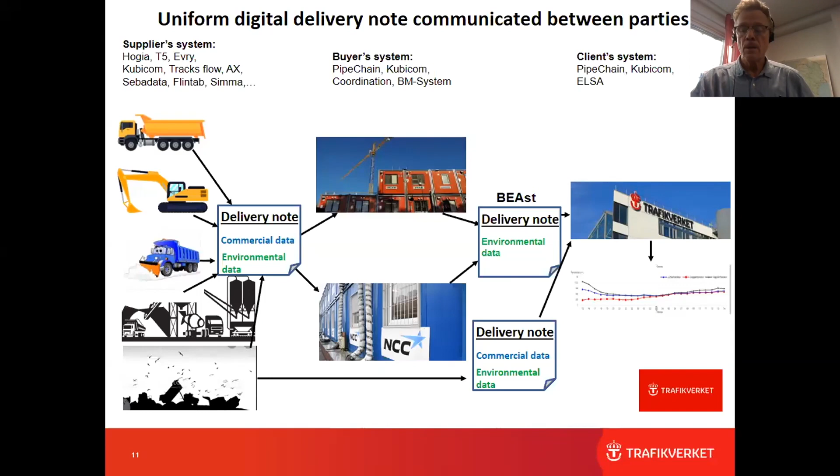When we go digital, we have less lag. Instead of having a report per project, maybe per year, of how much climate emissions they have done, we will have one per vehicle and day. We have much more time to solve the real problems instead of copying documents by hand and so on. One experience is that the number of errors in what is reported is reduced drastically when you go digital, and we will also have better foresight, early indications of possible deviations in the projects.

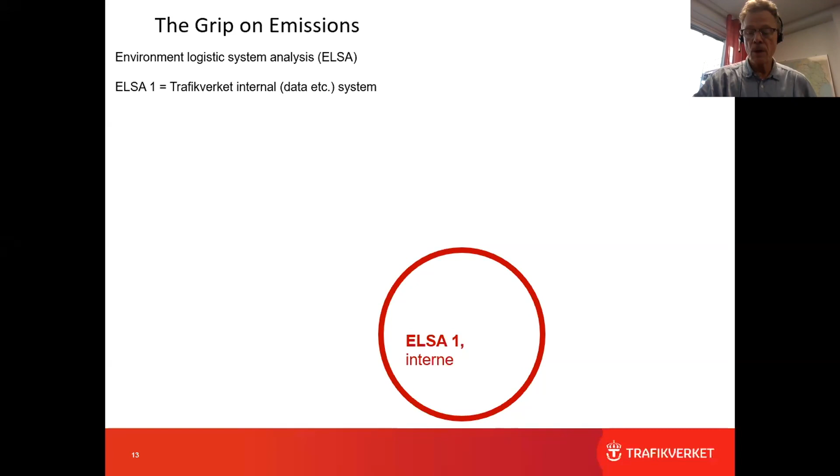How is the project constructed? We have this internal project to develop the system for the transport administration, and we discovered this standard, and we want to have pilot projects, trials, and we will do this since last year. We have an innovation project to try this with a number of companies, and they are developing their computer support systems. We will develop our procurement requirements so that we can have a rollout in Sweden on this basis. We have also discovered that there is an EU project, FEDeRATED for goods transport digitization, and we have already been accepted halfway through the EU project, as a member with a living lab, 22nd of this project.

I will see how much time I have left. A few minutes. I feel like I'm in a hurry.

Our innovation project at present, since last year, we are working with these 3 companies. 2 of them are contractors, one for maintenance and one mainly for investments. And the third one is a computer company.

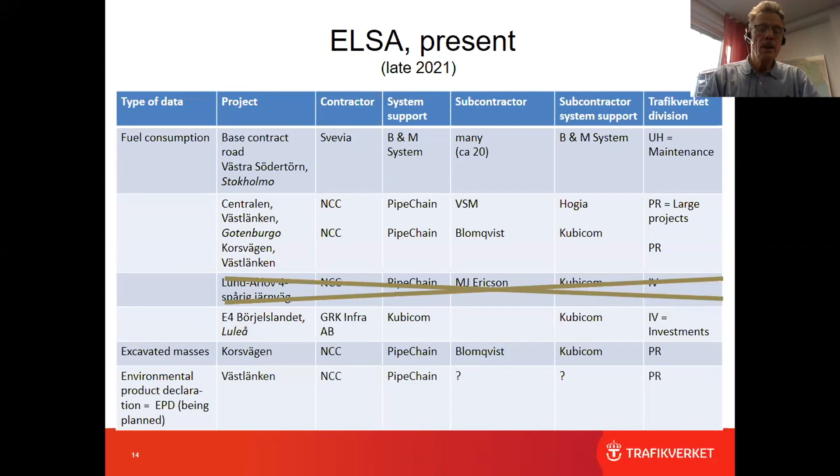Kubicom, and we are doing this reporting of fuel consumption and excavated masses. For excavated masses, it has been working since March, and there is also a short film about that, unfortunately still only in Swedish. We have also started to look slightly at the EPD.

When it comes to fuel, we have asked the BEAst organization to introduce some new codes, because we want to know not only how much fuel is consumed, but also how you know that. Maybe you're just counting standard consumption, not measured, once measured, and you apply it to all, or per hour or per work done of some quantity, or maybe you combine per kilometer with full load or no load, for example.

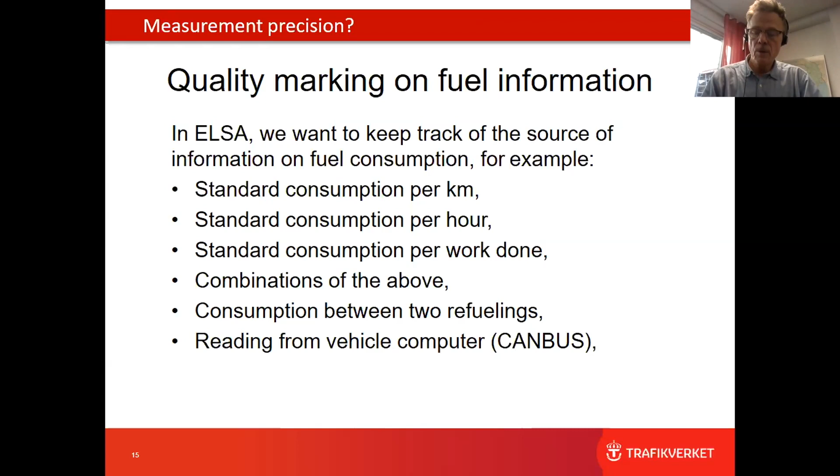Maybe you have a journal of how much diesel you are filling your lorry with. And maybe you are reading the computer, or you're getting this figure as the owner of the vehicle from the factory, the producer of the vehicle, or by other means. And we also want to know how often you read these measurements.

And if one lorry is going for 3 different clients, 3 different projects in one day, how do you distribute this consumption between these 3? By which method? We want all this reported to us - how do they know how much they have consumed?

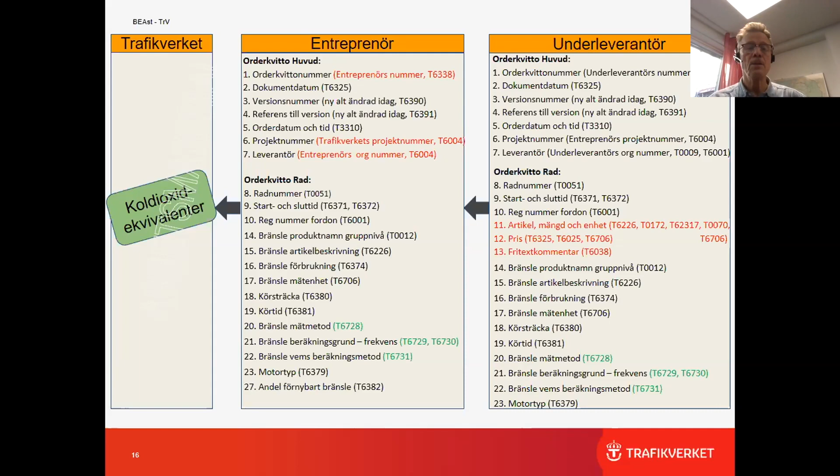So far, the EPD is concerned only with climate emissions. Of course, this is only a first step, because an EPD can take account of much more than climate. But it's a handy end to start with, because everybody's asking for it, so that's where we will start.

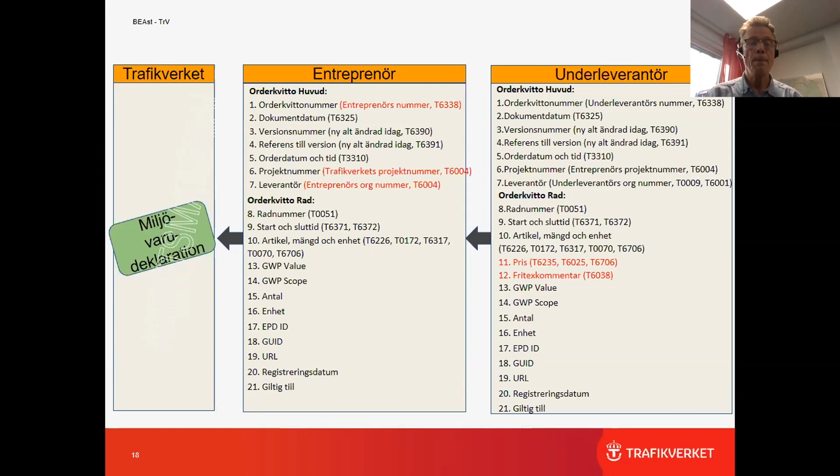And oh, I'm ahead of time. That's very good.

I was in a meeting with a BEAST construction committee 3 years ago. We were around 20 people around the table, from contractors, from subcontractors, from companies delivering various building materials, from computer support companies, maybe from a municipality - but I was the only one from the government, from the national transport administration. And then somebody asked: we have been doing these practical projects using the BEAST standard now for 6 years.

Or was it 7 years? And we have done more than 500 projects, and everybody is very happy, and nobody wants to go back to the old system - everybody wants to go on with this. And still, it is not spreading. Why is it not happening?

And somebody else says, well, the companies don't invest in it until they know that this is what will be. But how do they know that? And then somebody says, large clients must take the lead. And then everybody looks at me. Thank you.

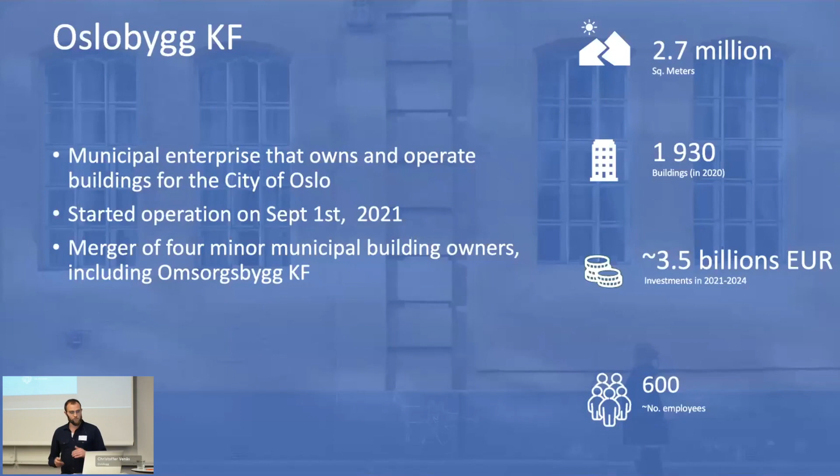So we're quite new. We started operating on the 1st of September. Before, we were 4 minor municipal building owners, including Omsorgsbygg, which was a part of the project from before, and which I represented before. So we're public, and we do public procurement of buildings.

I'm going to show you a bit of our portfolio, so you understand what we do. No offices, not that many houses. We do nursing homes, schools. This is the new main library. We have sport facilities, the Nordic ski arena, the newly opened Munch Museum, many kindergartens, and a lot of fire stations as well. So that is a bit about us.

I'm not going to say much about the climate strategy, but we do have high ambitions in Oslo, and this has been decided from the political side. It affects our approach concerning logistics from our side, I must say. I'll talk a bit more about the specifics when it comes to construction logistics.

Our starting point was basically fossil-free construction sites. We had dialogue with the market in 2016, and implemented this as a minimum requirement on our construction sites in 2017. Then we had a pre-project together with Sintef on zero-emission or emission-free construction sites, and that's basically how we ended up in this project.

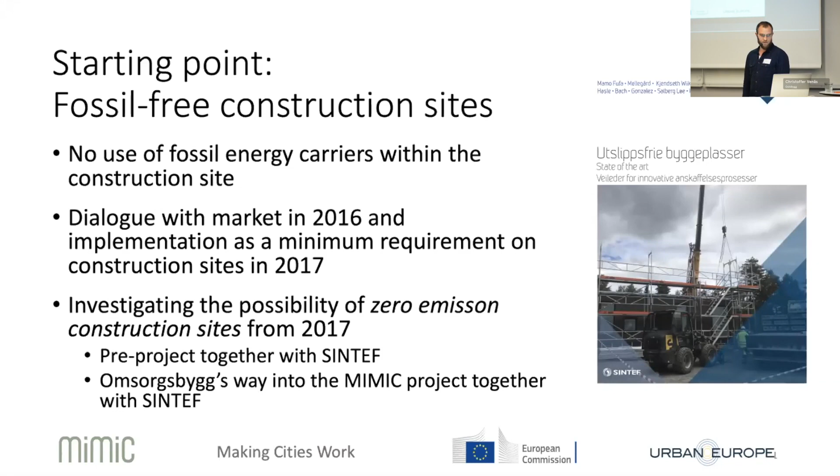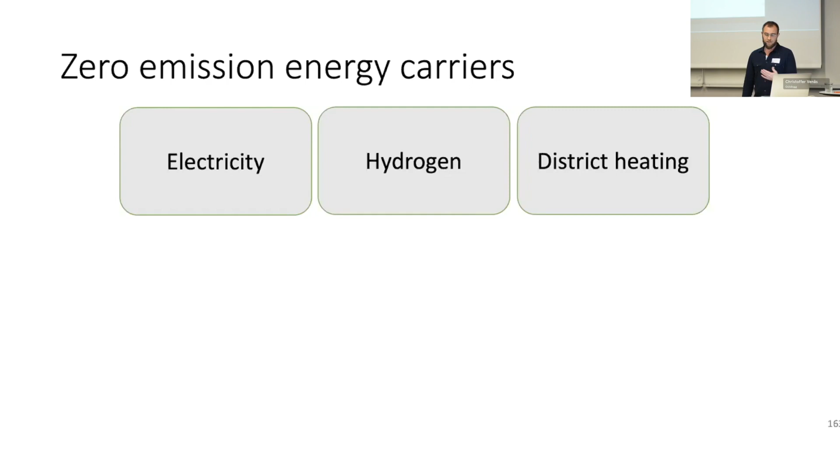Maybe some of you are wondering, what is this fossil-free thing? These are the fossil-free energy carriers as we define them in Oslo. So you could switch diesel with biodiesel and still fulfill our criteria. But we want to move to zero-emission, meaning we only accept electricity, hydrogen, and district heating for machinery and transport of bulk excavated masses, and energy and heating on the construction site. In 2025, we'll move to zero-emission construction for all our construction sites on municipal contracts. For now, since 2020, we have had award criteria to promote zero-emission machinery.

I'm going to speak a bit more in detail about that because it's important to understand our strategy when it comes to the building sites and the transports to it. But first, I wanted to say something about what we've done in Mimic.

We started out with Tåsenhjemmet, a nursing home under planning with several good qualities, quite close to the city center, plus house. We have a lot of wooden materials, so it's pretty low carbon footprint on material usage. It was supposed to be BREEAM Nor Excellent and also have a fossil-free construction site.

We started off with some interviews with key actors on the site in the planning, and they actually told us that the traditional turnkey contract could serve as a barrier to the early collaboration promoted in Mimic. So our traditional way of performing the project hindered us from involving the constructors and the people who knew the most about the site itself in the early phase.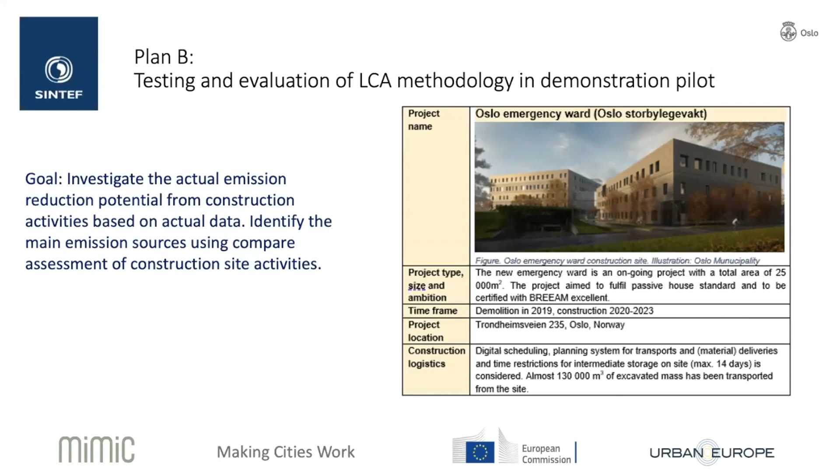So back to Tåsenhjemmet - it wasn't as big a part of Mimic as we wanted, but it's now in the detailed planning, where it's still a plus house with very good qualities, and we actually managed to get some logistics elements into the project, through using our award criteria. So that's what I want to talk about next.

We do have mostly electric machinery planned on site. The details are still being planned - the start isn't until next year. But I wanted to tell you about how we achieved at least some good logistics solutions on this site, and I'm going to do that as part of the last part of my presentation on towards emission-free construction logistics.

This is basically what we've done since 2020 in all our construction projects. We have to evaluate environmental factors as part of the criteria when we procure, and we have to weight it at about 20 or 30%. Construction machinery is always a part of it - it's larger than it shows in this figure. The same goes for the transport of bulk materials.

We also have quite open criteria on other transports, meaning that in all our offers we get something on the logistics, even though it's mostly related to the technology. Something is also about the effectiveness of the logistics setup.

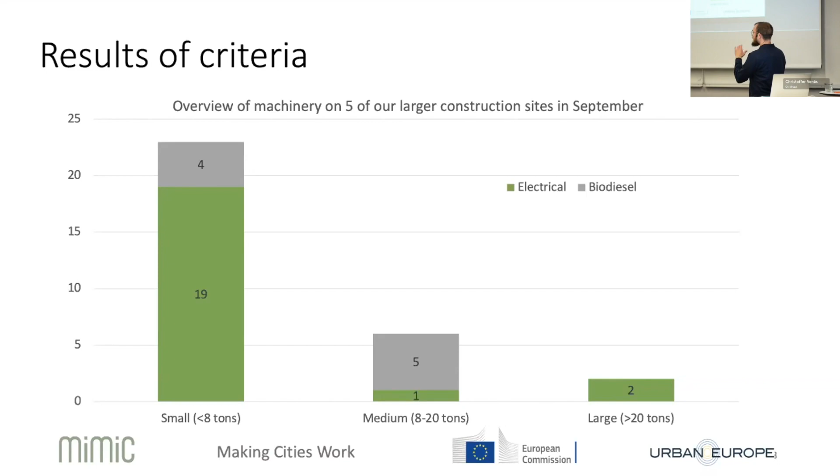I want to show a bit of the results. This is only from 5 of our construction sites with the criteria. You see the green one with the electric machines - this is only machinery. For the small ones, there's already a lot of electric equipment on conventional sites, but at least now we get mostly electrical and promote their use.

The large machines were not normally electric before, apart from the cranes. But now, in most of our offers, at least the bigger ones, we get electric diggers in the large or medium category. So we see that it is working, and there is more heavy electric machinery on our sites now than there was one year ago and two years ago.

I'll underline that with the lorries. We are asking for excavated mass transport by electric lorries, and we see that from 2020, it was 1% in Oslo that was newly registered vehicles that were zero emission or electric, and so far this year the percentage is 6%. So it's increasing, together with also the vans, which the municipality is also asking for in other contracts than the construction contracts.

Yeah, I want to go back there. Oh, I was so quick. Oh, nice.

I'll talk a bit because I wanted to show you this before I go to the last slide, because we do have quite high ambitions on the climate side, and that kind of affects our thinking.

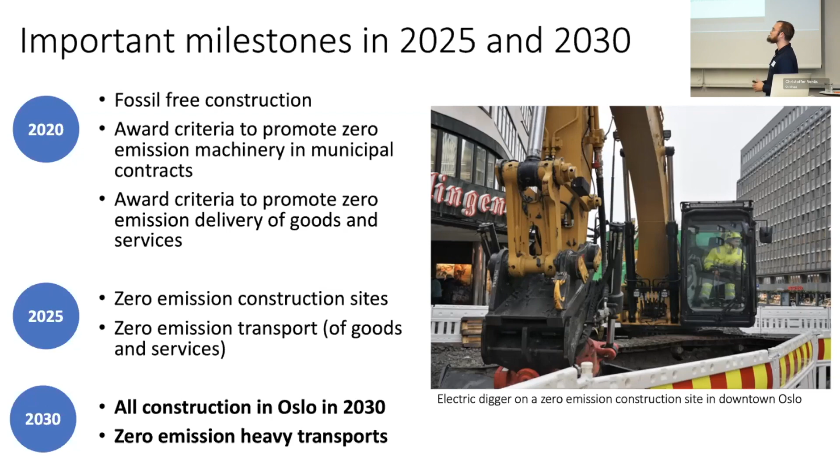Bringing in electric machinery affects this, because you don't want to waste the energy you have on the battery. So it will, in the same way as we said before with the innovation, help the constructor think about the machinery earlier, and it even helps us think about the logistics from an earlier stage. So at least it helps us a bit.

I also wanted to mention that now we're Oslobygg, we have a bigger portfolio and want to see more of our projects together. That means the connection between projects might strengthen us, and these kind of consolidation centers and thoughts might be more relevant for us when we get bigger projects, several closer to each other, that are run by us.

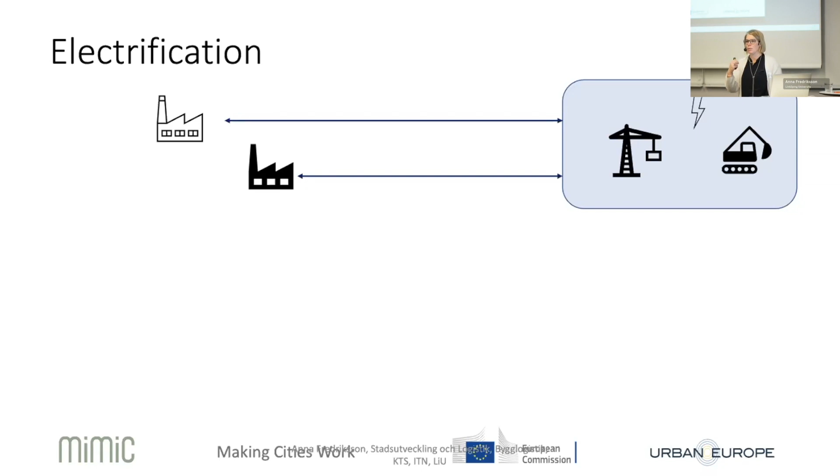However, with electrification comes two questions. This is a friend of mine and colleague in Linköping, Per Lindahl, who talks a lot about this, because it takes about 10 minutes to refuel a heavy truck with diesel, but it takes a lot more time to recharge a heavy machinery or heavy truck. And that time, once again, is money—it's lost money. At the same time, these electrical vehicles are more expensive, and they take a lower load, meaning you have to have more of them to transport and move the same amount of materials.

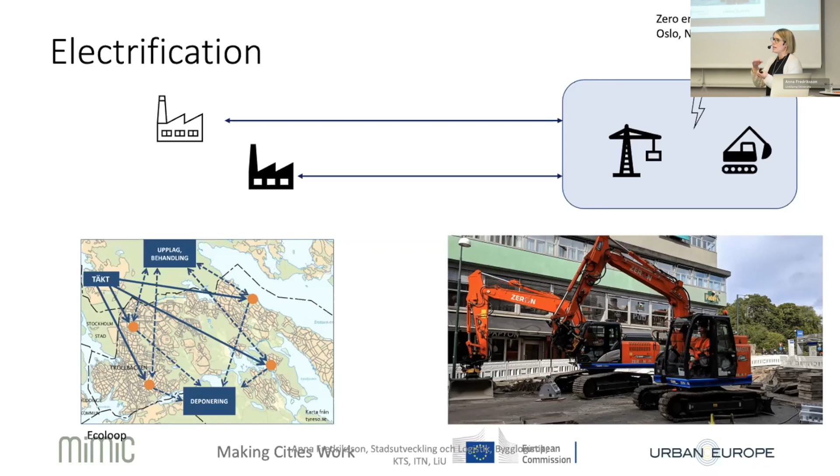We also need to think about how to accomplish that in combination with the circularity of earth and rock masses—how can we move things as few times as possible with electrical vehicles, without increasing the amount of vehicles in urban areas, without taking longer for construction sites, and while also handling the limitations of available electricity or power in the system.

So in order to succeed, we need new ways of organizing transports in construction projects. We can't leave it up to the drivers anymore, because one of the most frustrating things I hear is when someone says the best transport planner is the driver. No—the best driver is the driver, but the planner is someone who has the overview, who can look at several transports at the same time, who knows what nodes you're driving between, and so on.

So we need new ways of organizing transports in construction projects, and we also need better coordination between the site and the transports to and from it, because we're going to share the recharging stations. How do we make sure the recharging at the site is available for the lorry arriving, and that it's going to move away? So we need to coordinate between the machinery and the lorries.

Since these electrical vehicles—machinery or lorries, it doesn't matter—are more expensive, if something is more expensive we have to utilize it more so it's not more costly to use. So we need to think about how to utilize the machinery more hours at the same time, and how to balance investments in loading equipment and vehicles. We need to move away from complex movements between construction sites toward a neat and easy way of moving between them.

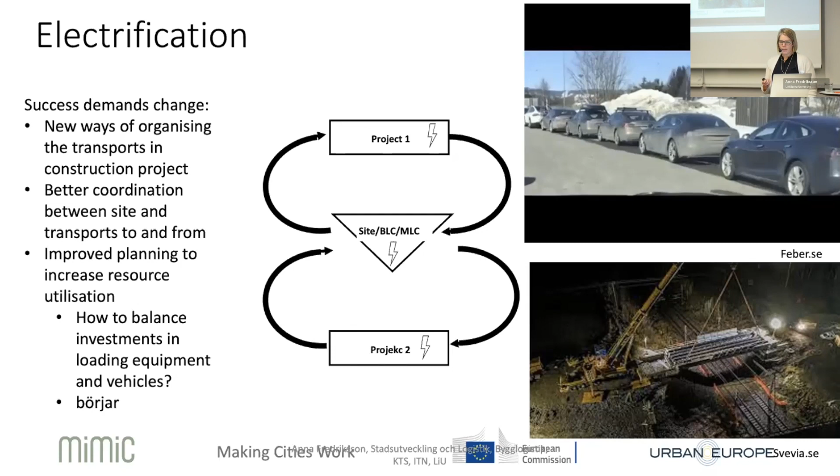Or with solar charging or whatever. But we need to think about this. These are the challenges ahead as I see it. And as a lot of us have been into data, we need data, because with data we can start doing simulations.

Me and a colleague, Ahmet, have collected data from 40 construction projects now. However, this data is of such low quality that it's almost impossible to make a statistically viable simulation. Selamavit, Nicola, and I know you have collected data too. Nicola, you've also had a lot of problems with data quality. Selamavit, you collected data from one project. But in order for us to do simulations, we need data from a lot more projects, as Peter talked about. We need data from several thousands of projects, preferably. So how do we get hold of that? We need to think of new ways of collecting data.

In another project, I got very upset because they couldn't tell me how many trucks were passing the gate. So my colleague Rasmus and I found out that we could use these hoses on the ground to measure the passings at the gate. However, it was extremely expensive to buy one of these standard solutions. Why, I don't know, because these hoses are actually rather cheap.

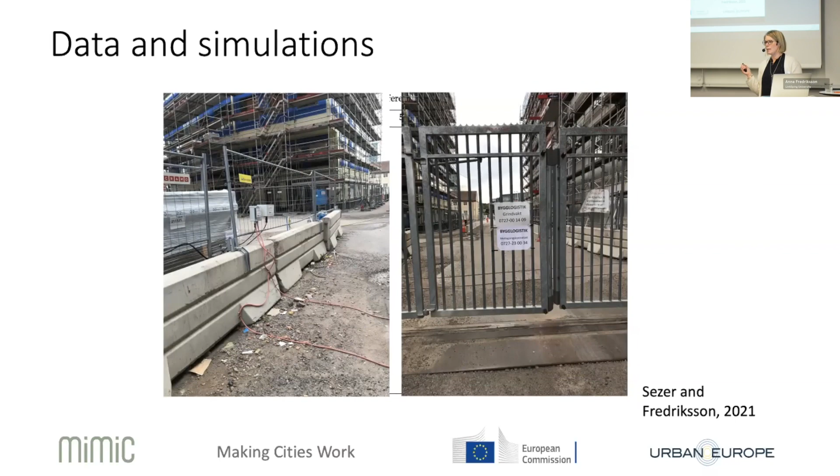So we developed our own system and put it up at a construction site in Linköping. With this system, we can actually capture the number of transports moving in and out of the site. We can see when during the day they arrive, and what type of vehicle it is - long or short - because you can see the difference in the data pattern of wheels passing the hoses. This system costs maybe 5,000 Swedish kronor. So saying it's a cost issue to collect data, I don't think so. I think it's just that this industry isn't used to thinking about collecting data.

But we also need that data combined with other data to make these types of simulations that Peter presented. This is another simulation, also made in MATSim, which we've done in Norrköping - a similar model to Peter's over Vienna. With this one, we can see the impact of heavy goods vehicles - if we have 6 sites in the center of Norrköping and know the transport pattern of those sites, how much transport they'll generate over the day and over the project time, we can simulate the impact on the urban infrastructure in advance.

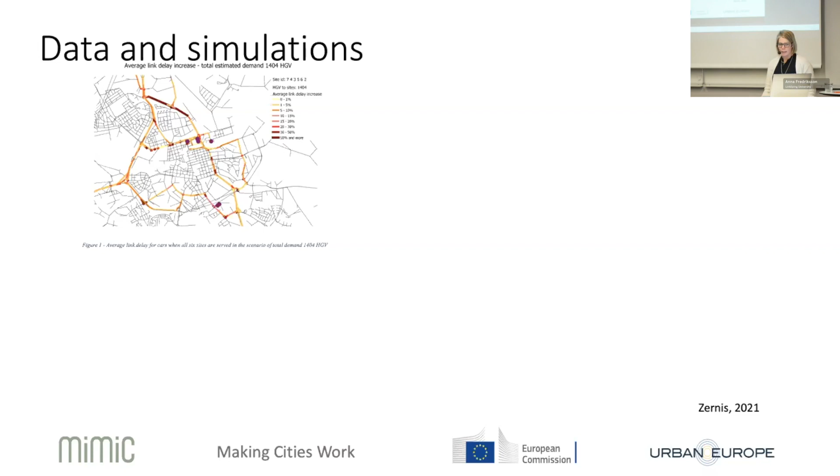And also, as Martin mentioned, maybe I'm a bit of a cynic, but can we use environmental legislation as a demand to collect data? We can use that data for much more than environmental impact - also for productivity, for efficiency, and for how we can decrease the disturbances of construction projects on the urban area in general.

So yeah, this is where I see we're going to continue. And in order to implement it, of course, we need to start working on planning and decision processes as well.

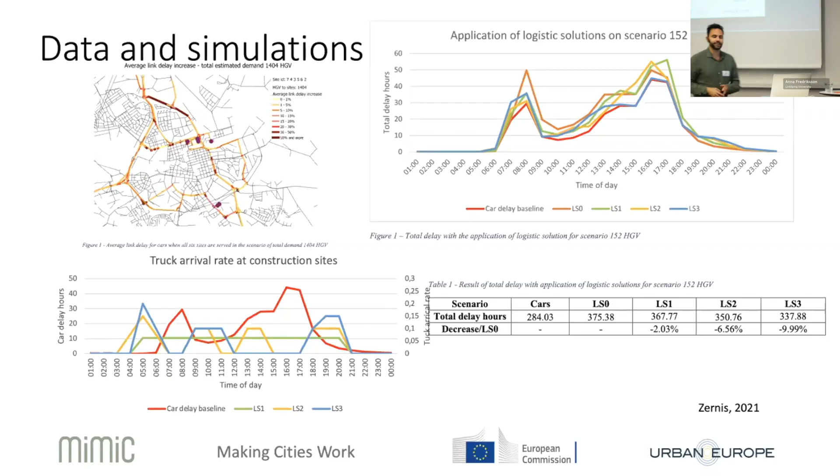Great, and if that didn't spark questions and discussions, then I don't know. So thank you, Anna, for that.

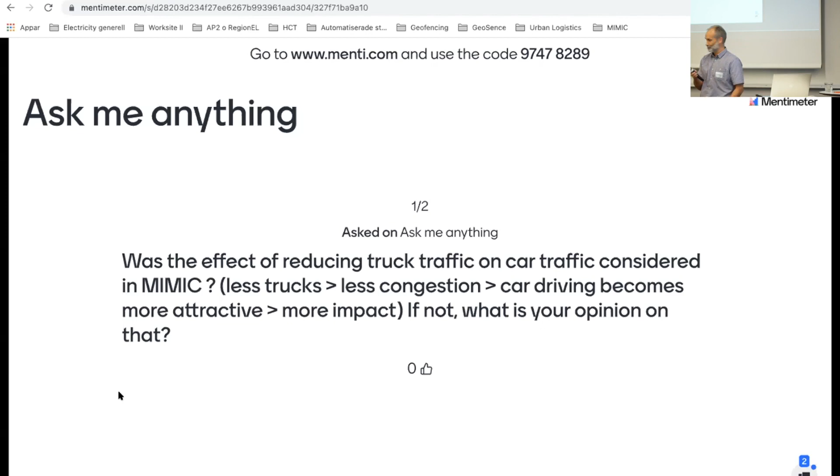Thank you, Peter. We'll take the last question before we move on - that was to Anna. Did the contractor understand the user value of tracking the number of vehicles arriving at the construction site? It's a good question. Not to start with, but after a while.

We had another project where we put a smart delivery container at site - I don't know if you've heard about these, but they have lockers opened by Bluetooth, and you can come and deliver things whenever suitable, and the guys at the site pick it up whenever suitable. That removed a lot of small transports - now we're moving from heavy vehicles to more vans. In this case, we could see that the guy responsible for internal logistics at that site decreased his walking distance by about 5,000 steps a day.

So if you put it down to that level, then yes, the contractors understand the relationship between a delivery - which Ole talked a lot about - a delivery which for the city is a transport, but for the construction site is a stop in the working. A delivery means loss of productivity because you have to stop your work and go collect the things. Once you translate the number of deliveries into lost working hours, the contractors become very interested in knowing the number of vehicles.